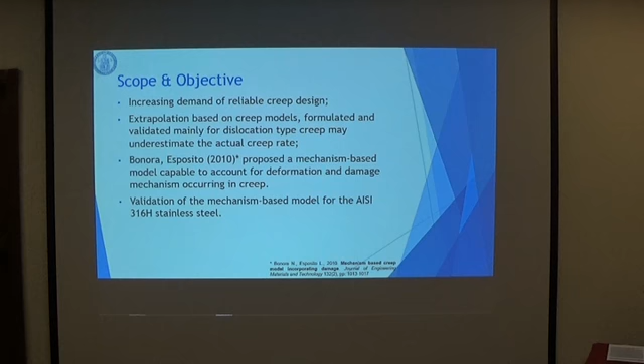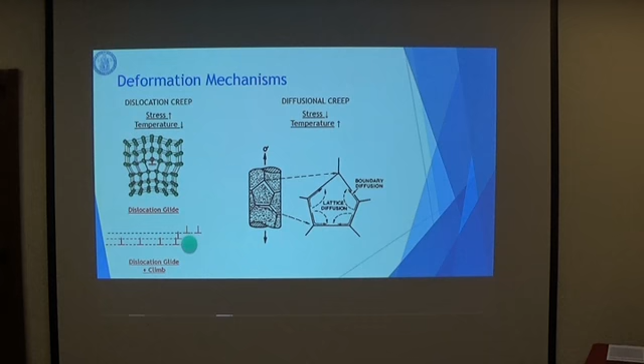Depending on stress and temperature, there are mainly two different deformation mechanisms. So we are talking about dislocation, so dislocation glide or dislocation glide plus climb, or diffusional creep. For each of these mechanisms, there are specific models available in the literature, most of them in a form of an n-power law solution, like this one, where the term A can be made explicit for the temperature in terms of Arrhenius law.

In case of diffusional flow, there is a linear dependence of the creep rate with the stress, while talking about dislocation creep, the strain rate is going to be proportional to the power n of the stress. That means that if we have a constant value of n, which can be, I don't know, 5, 10, in case of low stress value, the creep rate can be largely underestimated.

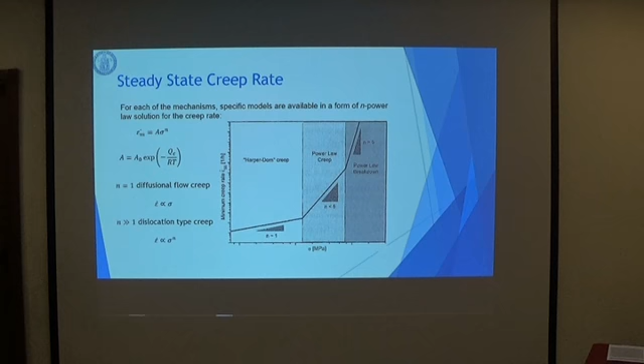So experimental creep data relative to a wider stress range seem to indicate the existence of an exponential dependence of the creep rate on the stress. And this behavior can be explained as a result of the gradual change in the creep mechanism, going from dislocational to diffusional, so from high stresses to low stress levels. And this cannot be described by conventional models with a constant value of the creep exponent n.

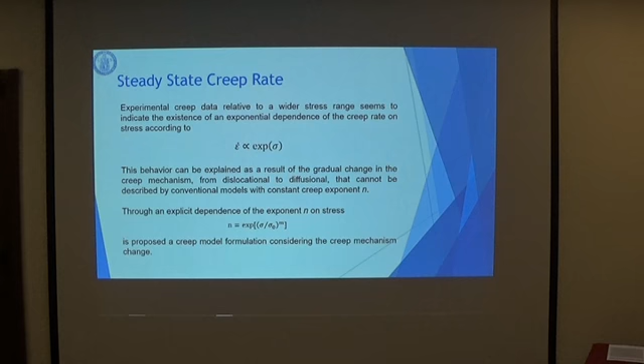So, through an explicit dependence of the exponent n on stress, here we are going to propose a model which takes into account the change of mechanisms from dislocational to diffusional. So, the minimum creep rate can be seen as a sum of two contributions. The first one is the dislocational contribution, and the second one is the diffusional one.

Then, considering the Burton equation related to the diffusion theory, we have that the minimum creep rate for the diffusional contribution is proportional to the product between the vacancy diffusion flux and vacancy concentration, times the ratio between the atomic volume and the average grain size. If we make explicit the dependence of the vacancy diffusion flux in terms of vacancy diffusion coefficient and atom diffusion coefficient, we have this equation.

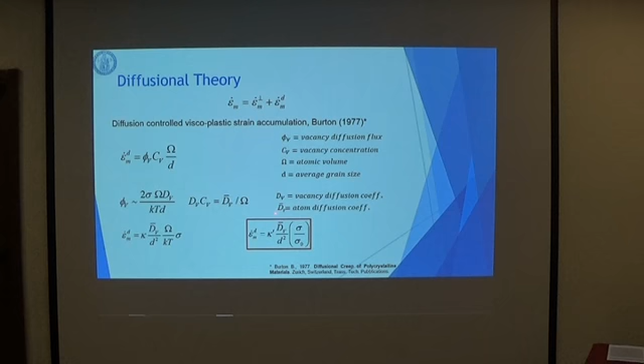If now we consider the contribution of the dislocational mechanisms, we can see there is an explicit dependence on the stress level for the exponent n, as I was talking before, while for the diffusion part, the exponent is equal to 1.

And it's also convenient to consider a threshold value of the stress below which the mechanism of dislocation and diffusion is, let's say, inhibited. Here we consider just the one related to the dislocational contribution because the one related to the diffusional one is very low.

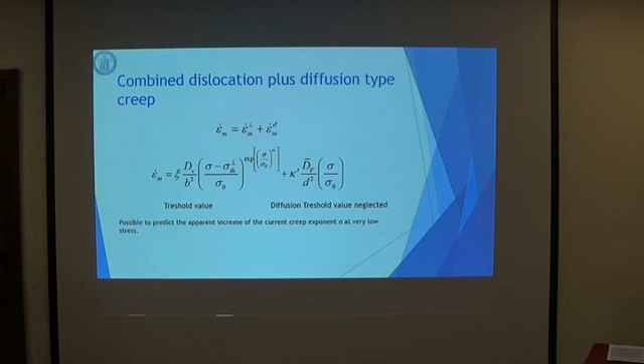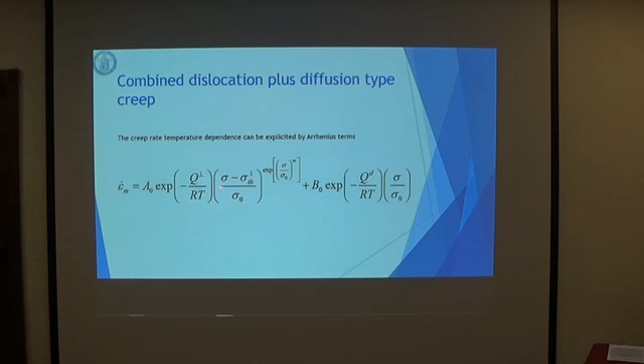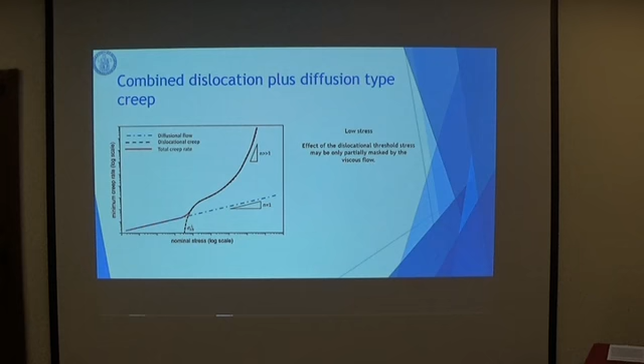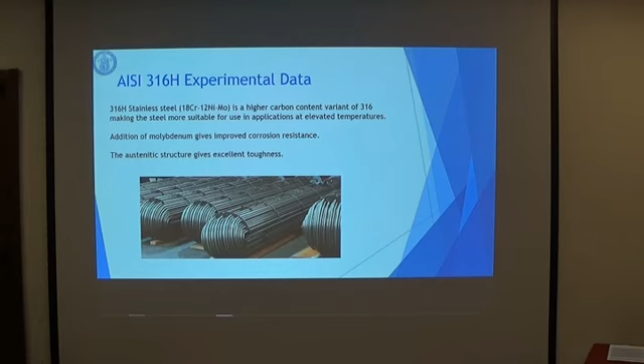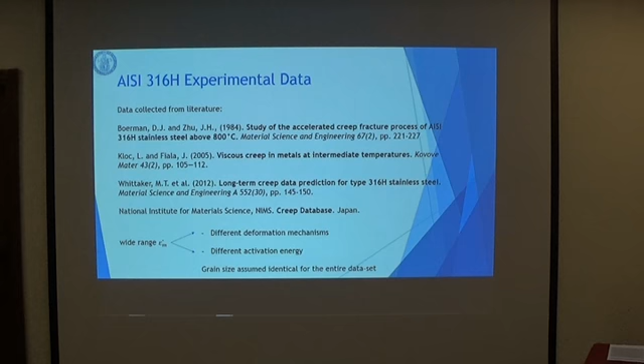So in order to validate this model, we found some data in the literature related to 316H stainless steel. The data are mainly from Boerman and Zhu, Kloc, Fiala, Whittaker, and the Japanese National Institute for Materials Science. And we have a wide range of minimum creep rate, and we are sure that there are different deformation mechanisms which are activated by different activation energies. In this study, we are not considering a different grain size for the data.

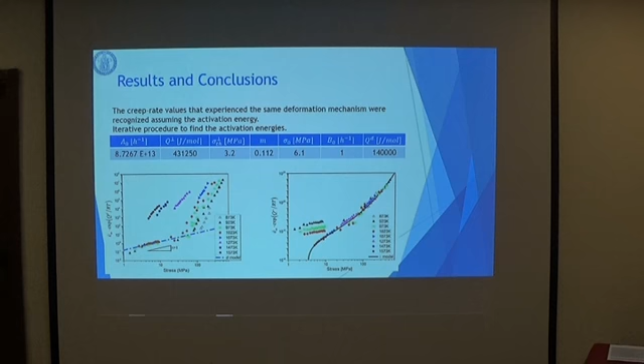So we have normalized the minimum creep rate through the temperature with the activation energy. And let's say the activation energies are kind of consistent with what we were expecting. And here we have, with the black curve, the dislocational contribution of our model and all the data we were collecting.

As you can see, the data which are related to the dislocation deformation mechanisms are gathering all together on this black line. We obtain this because with the normalization we are, let's say, allowed to aggregate all the data which show us the same deformation mechanisms. While for these data which are scattered from this curve, it seems that they are not related to this kind of deformation mechanism.

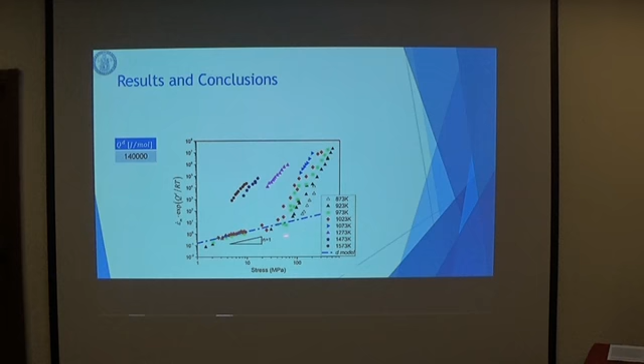For the ones here on the top, we are supposing that the threshold value will, let's say, have an important role for the description of the minimum creep rate.

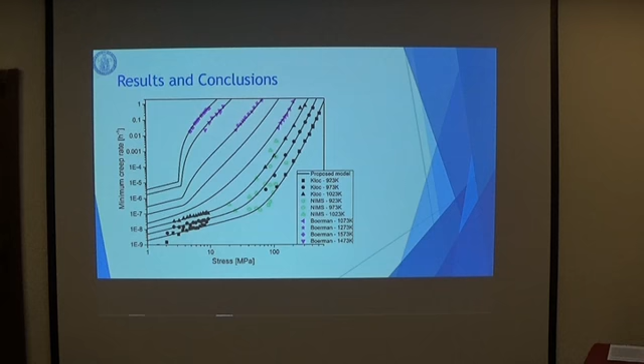So, concluding, the proposed model follows the mechanism's evolution according to the deformation mechanism maps. Then the model is able to predict the nonlinearity of the double log plots of minimum creep rate and stress, both at high stresses with the threshold stress value and also at low stresses. Then the activation energies used in the model to obtain the correct values of the minimum creep rate are consistent with the experimentally measured values.

And then we demonstrated the applicability of the model with the 316H stainless steel data. I finished.